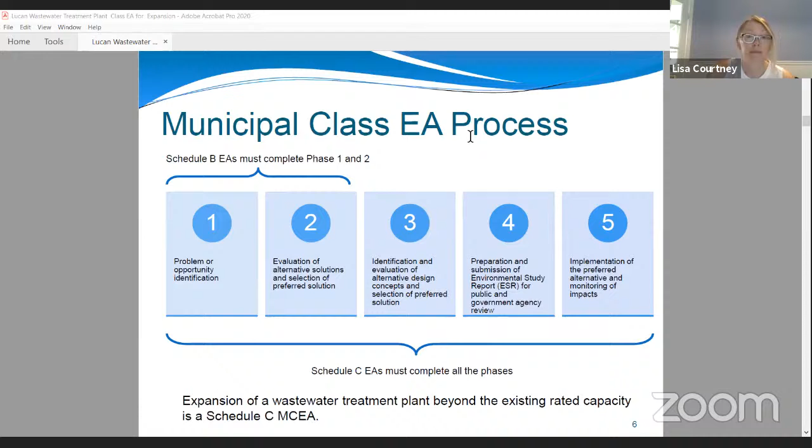Consultation is a key component of the Class EA process. And as part of that, we are required to consult with provincial and federal agencies, First Nation and Métis communities, adjacent property owners, any stakeholder groups that may be interested, and the general public as well.

For most EAs, you'll have 2 mandatory points of contact, and these typically are the notice of study commencement and the notice of study completion. But for many projects, we will often hold a public meeting just to provide an opportunity for the public to provide more feedback and learn more about the project.

So for this particular EA, we've already got started on the consultation. So the notice of study commencement went out in the local papers. We also mailed it to local review agencies and the First Nation and Métis communities. And so far, we've received comments from the Ministry of Environment, Conservation and Parks, the Ministry of Heritage, Tourism, Sport and Culture Industries, as well as the Chippewas of the Thames First Nation.

The notice was mailed out to adjacent property owners, so we made sure that they were aware that the project is being undertaken. And we anticipate that we'll have another public meeting at a later date when we have more information to provide to the public.

Your mic's off, Steve. There we go. Thank you, Lisa.

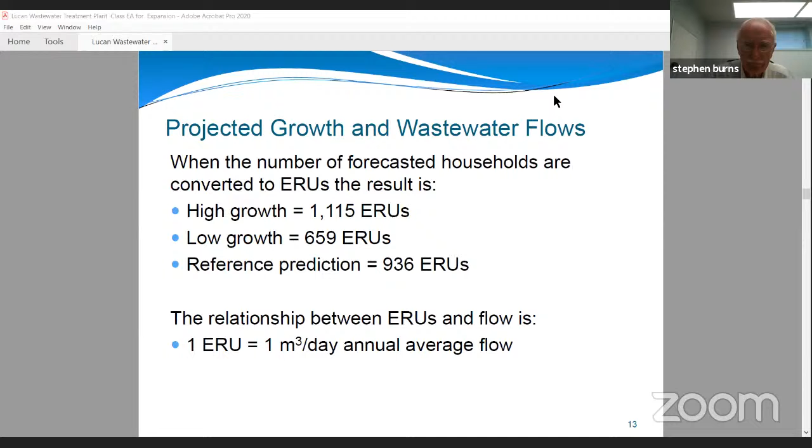So when you take the households and you take into account the mix of development type, and you turn it all into ERUs, what you get is, again, a high growth projection of a little over 1,100, low growth about 659, and the reference prediction in the middle about 936. And again, I didn't get into the details of it, but in the case of Lucan, one ERU produces about 1 cubic meter per day of wastewater on an annual average basis. And that 1 cubic meter also takes into account non-residential development. So the assumption is if you grow residentially, you get continued growth commercially, institutionally, and so on. And that's all factored into that 1 cubic meter.

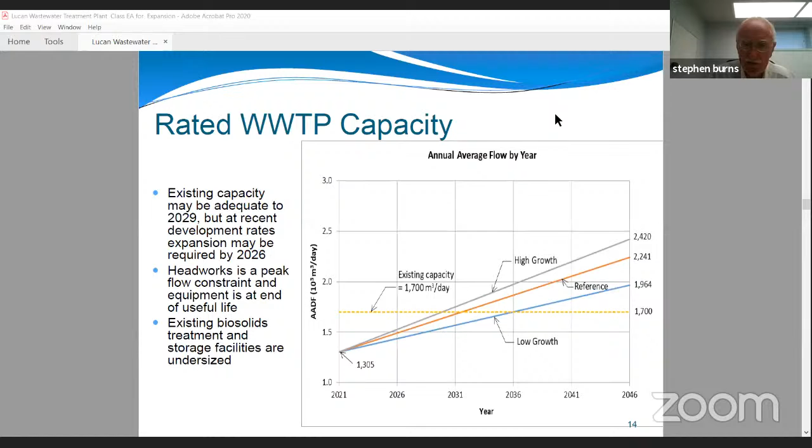So then there's a couple of other things on the left there in the text. It talks about some other specific issues that relate to this. The headworks, which are the first component of the plant, are the current constraint to the plant in terms of peak flows, and need to be addressed. And the biosolids or the sludge management facilities are significantly undersized. And I'll get into the details of this later, but even outside the issue of growth, there are a couple of problems that would really need to be addressed anyway, even if there was no growth. So next slide.

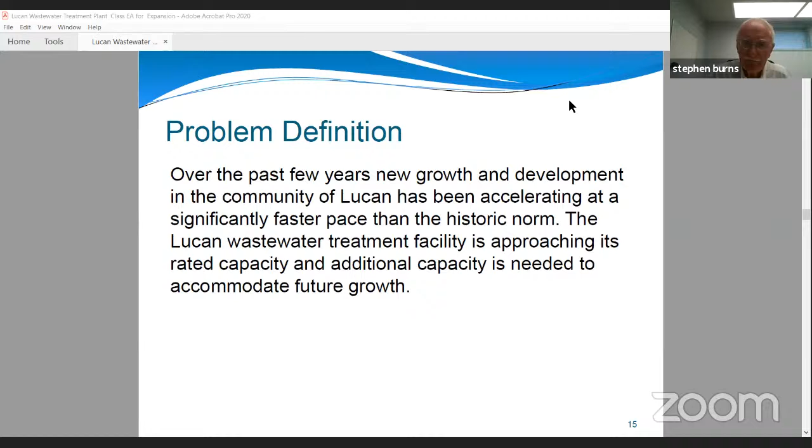So in terms of environmental assessment, what we like to do is make a clear statement of what the problem is that we are attempting to resolve. At this point in time it's still subject to fine tuning, but it really says over the past few years, new growth and development in the community of Lucan has been accelerating at a significantly faster pace than the historic norm. The Lucan Wastewater Treatment Facility is approaching its rated capacity, and additional capacity is needed to accommodate future growth. So that's why we are doing this environmental assessment, to find the best way to solve this problem.

And in the Class EA procedure, you always start off by looking at the high-level solutions to the problem, which range from not trying to solve the problem at all to the intricacies of how you might address it technically. And in the case of this particular problem, which is generally a wastewater treatment plant capacity problem, we've looked at 6 different things that could be done. And this is a pretty typical mix for this type of situation. The first one is possibly we could reduce the existing sewage flows. And through reducing the existing flows, we would by default create capacity for future growth. So that's an option, and that needs to be explored.

The second one is that the municipality could say, well, we want to limit the growth of the community. We have capacity for 1,700 cubic meters. We'll grow to that and just park it and stay at that. So that is in theory an option. We could expand the plant, which is sort of the theme of what we're doing here. Alternatively, we could replace it, and there have been projects where we started out looking at expansion and actually opted to replace. We could also, and often one of the first things that we would look at, rather than expand or replace, re-rate: find a way to argue that 1,700 cubic meters isn't really the capacity, and we could actually treat more wastewater. And so that's an alternative which we have explored.

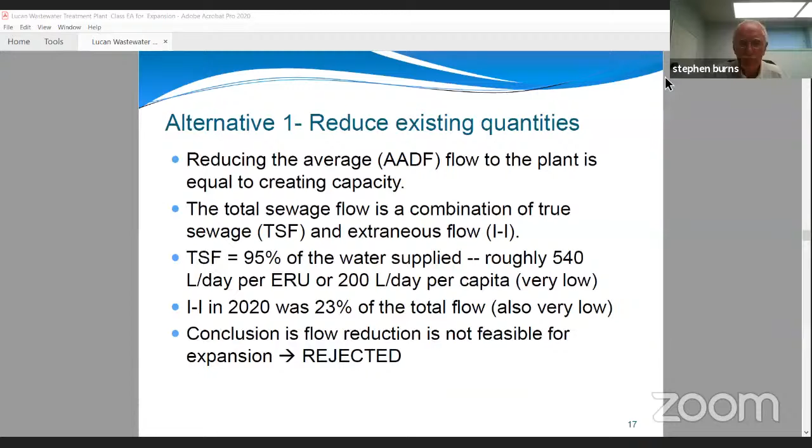So then we get into looking at growth, and we know already that the existing flows and the commitments are about 93% of the plant's capacity. So there's still about 7% available to be allocated. Not very much. We know that if you were to say we're going to not grow beyond whatever would produce 100%, you're not being consistent with the provincial policy statement, which is the province's ideas of growth management. You're not being consistent with the county official plan or your own official plan, which all encourage growth. So you'd be swimming upstream against planning.

We also know, in addition to the fact that there should be growth, that there is substantial growth pressure. We know from the number of proposals, we know from things that we can see happening in the street that there is a desire for growth, and we don't expect it's going to decline. So limiting growth, we have rejected as a solution here.

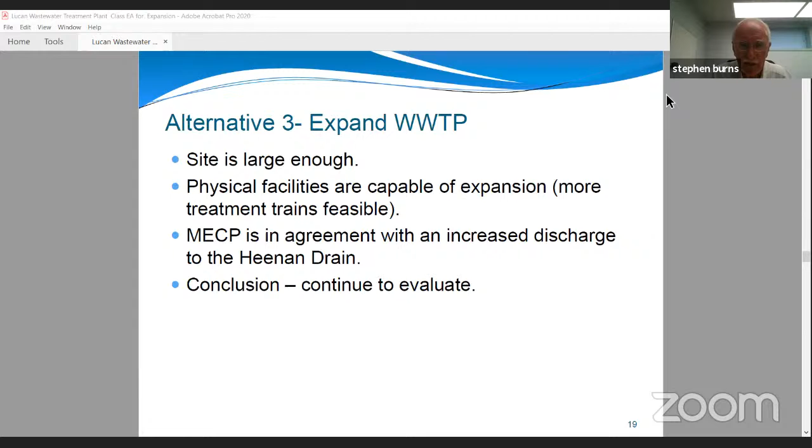So sometimes in this type of a project, if you get into looking at expansion, you may find that it makes more sense to replace. Circumstances might be that the facility is very old, technology is outdated, physically it's deteriorated, or it may be driven by the need to have a much better, higher level of treatment. The assumption here is that if you were to replace it, you'd probably do it at a different location. But that's not necessarily so. You might do it immediately adjacent to the existing facility.

You do this if the technology is not functioning well. But in this case, it is. The plant is treating the wastewater to the extent that it's supposed to. So that's not a driver for changing the technology. We know that Heenan Drain is an adequate receiver. We've determined that. So that's not a driver for going somewhere else and building a new plant.

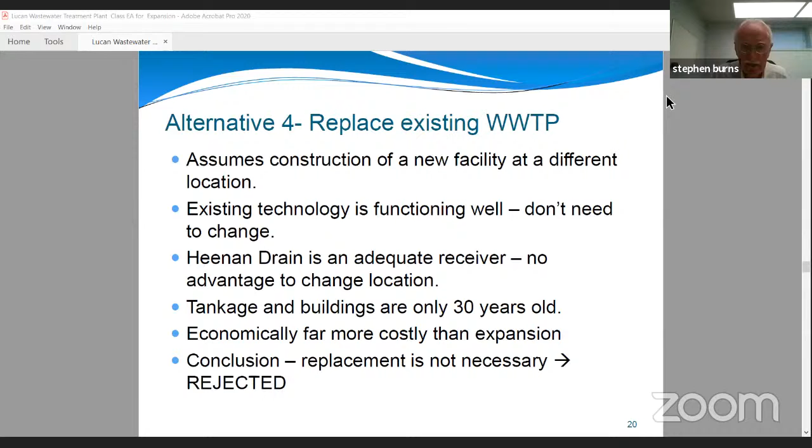And we know intuitively that if you replace it, it's going to cost you far more than if you expand it, simply because in a replacement, you'd have to replace the existing 1,700 cubic meters. So a replacement facility would be a bigger project than an expanded facility. So it's going to cost you more money. So alternative 4 in this case, we've rejected. There's just simply no reason to do this.

So the re-rating is always a good thing to look at, and it's usually the first step in looking for more capacity. And in this instance, we've rejected this as well. The key reason is that it's already been re-rated once. Physically, what is out there is essentially the facility that was built 30 years ago. Ten years ago, it had some improvements, and with those improvements and an analysis of the plant, they were able to convince the ministry that the plant could treat 1,700 cubic meters a day.

So it got re-rated. Now, we conducted a detailed evaluation of the plant components, and we've concluded that it's not feasible to re-rate this plant again. It's been done once, can't be done again. So we're looking at physical expansion as a solution rather than re-rating.

So this is rejected. And then again, we're at do nothing, and it's simply a choice to not resolve the capacity problem. It would be a lot like alternative 2, limiting growth. That would be the outcome of the default. But because we haven't really delved into the economics of this yet, and we haven't gotten entirely into the weeds of the technical aspects, it stays as an alternative that continues to be out there and considered. So next slide.

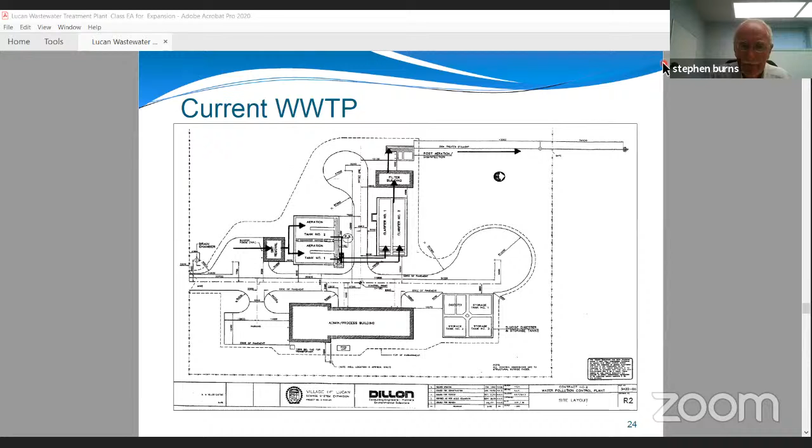And they are a component of the plant that is significantly undersized. They're part of the 1990s construction. Nothing was done in 2010 for them. They were designed based on a different standard in terms of volume that you should have, and are simply not sized for the sludge that you would generate from a 1,700 cubic meter a day plant. So the consequence is that much more often than desirable, the sludge has to be removed from those tanks and taken off site. So next slide.

And at this plant, essentially all of the wastewater that gets to it comes from the Chestnut pumping station. And at that pumping station, when the flows get very high because of a rainfall event or something, peak flows are diverted to the existing sewage lagoons and then brought into the plant later.

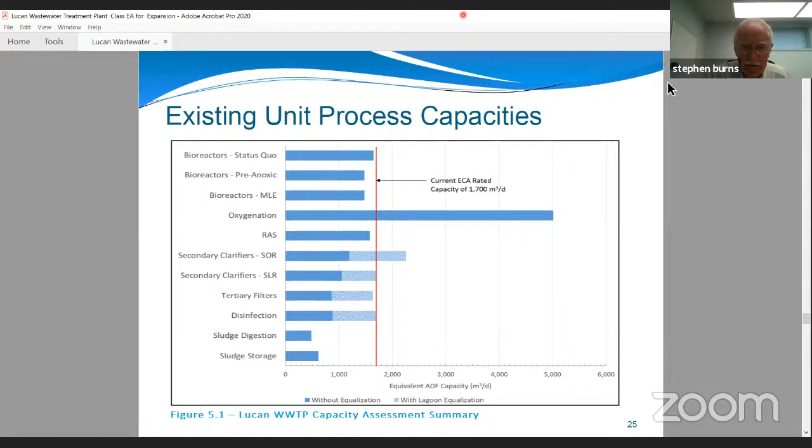And you can see the value here of that diversion, because with diversion, we can see for the clarifiers and the filters and the disinfection system that we're good at 1,700 cubic meters. If we didn't have those lagoons, all of those things would have a lesser rating and need greater expansion. So it's out of this exercise that we've really confirmed that you can't re-rate the plant. It's essentially rated pretty close to right.

So now that we know what each component can do, we look at what are the considerations in terms of how big it should be, how much capacity do we need. We know we need to accommodate the growth projections, and we've projected growth out 25 years. In a greenfield project, where you're just building your first plant, you'd build for 25 years. When you're looking at expansion, you don't necessarily have to look out that far, but we need to accommodate some reasonable amount of growth.

We also always have to pay attention that there's uncertainty regarding that growth. And you think back to what the county predicted. They had 3 lines, not 1. And that is a measure of uncertainty. And the high growth line is almost twice as much. It's about 1.8 times, I think, the low growth projection. So there's a lot of uncertainty. It might grow or it might not.

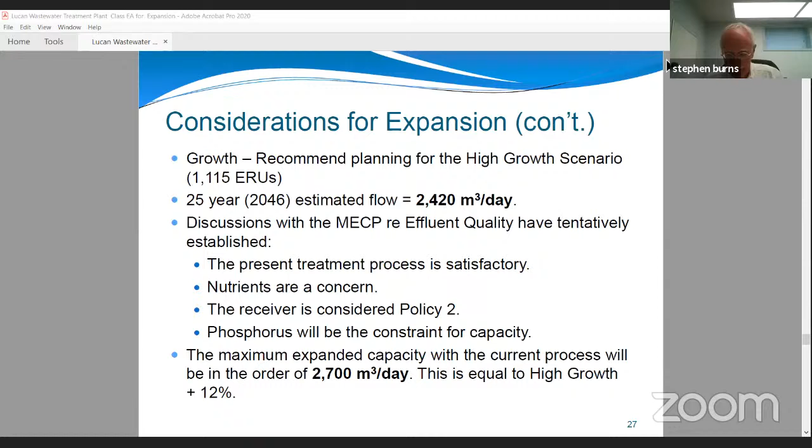So in terms of physical expansion, we're going to see a number of things that have to be either made larger or more of. At the Chestnut Sewage Pumping Station, we will need larger pumps to get more wastewater to the plant. We expect we will have to parallel the sewage force main the sewage is transmitted from there. The pipe from Chestnut to the plant would be paralleled, and that will also provide some redundancy, security. Bioreactors and final clarifiers, there'll have to be more of them.

Filtration, there will likely have to be another filter for sure. UV disinfection will likely result in replacing what is there now with a larger UV facility rather than attempting to add more. But that is a final design detail that will be worked out.

And one of the most extensive components of the expansion will be to correct the deficit in the biosolids or sludge treatment and storage. As part of that, one of the things we're looking at is expanding the treatment component and pumping the treated sludge over to the lagoons for storage. So using the lagoons not just for peak flow equalization, but also to treat and store our sludge.

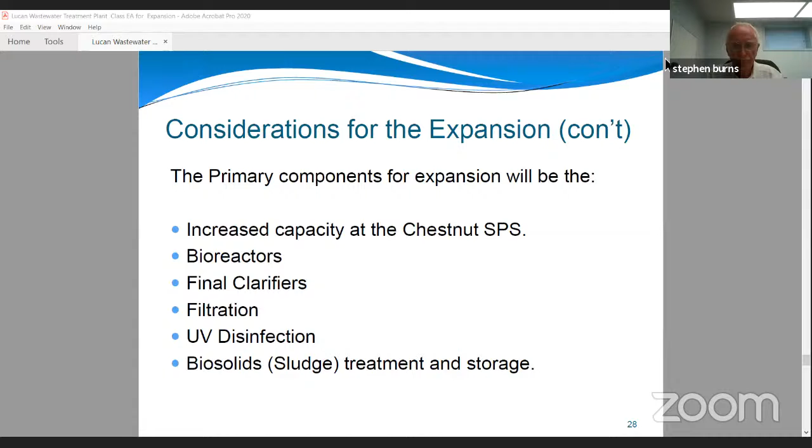The alternative is large concrete tanks at the plant, and we already have lots of those. So if we can take advantage of the lagoons, it would be much more economical. So again, it's the same slide as before. We're looking at expanding the bioreactors and the clarifiers.

I talked there about there being 2 trains. So we have the option of adding 1 more train, which is in effect a 50% expansion, or adding 2 more trains, which is in effect a 100% expansion. Now, 50% will get us to somewhere between 2,200 and 2,475 cubic meters a day, depending on some options we have for the bioreactors. So that 50% expansion gets us to slightly under to slightly over the 25-year growth projection.

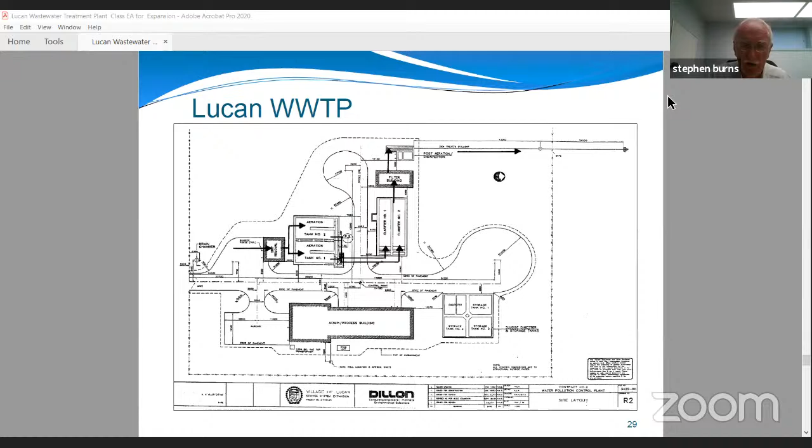If we did 4 trains, which is certainly an option, that would be what we would do to get to 2,700, but then we would have a surplus of capacity because the ministry won't allow us to rate the plant above 2,700. So again, the logical approach to expansion is to add more trains, and we're currently looking at whether it should be 1 or 2, and the benefits and costs of both. It's going to be largely an economic decision, but there could be other factors.

In terms of wastewater treatment, you can have too much capacity by having tanks too big. It can make it more challenging to treat well. So that's something that gets weighed in the final design as well.

But we know that with 1 train, we've got capacity until at least 2040. We could service 900 equivalent residential units beyond the current usage, and that 900 units would take all of your present commitments, all of the present proposals, and provide capacity for another 325 future proposals that haven't come to the table yet. So that's what 1 train will do.